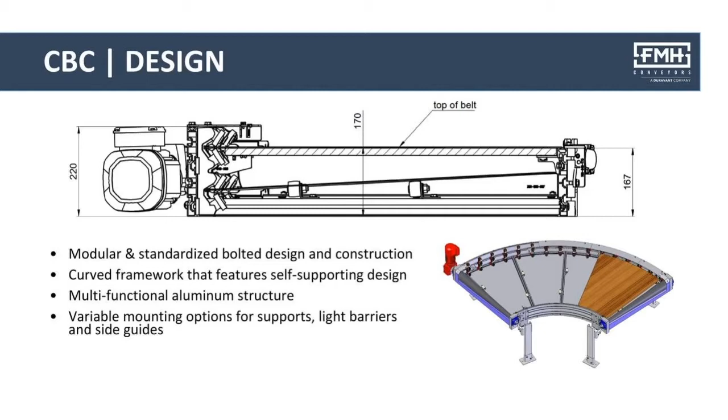Looking at the design, we have some abbreviations to help us gather the right information. We'll walk through these briefly. RI is the radius inside, or the inside radius of the belt. Nominal width is NW.

AN is our angle nominal, or nominal angle — that's our 90 degree, 180 degree of the curve. RCL is our radius center line. CH is conveying height, also top of belt or top of roller for roller applications.

SGH is side guide height, the height of the side guides above the belted surface. UW is usable width, also our between frames.

ROF is radius outside of frame. RIF is radius inside of frame. CSC is conveyor speed center line — the belt speed is measured on the center of the belt. CCW is counterclockwise, or left-hand flow. CW is clockwise, for right-hand flow.

In the graphic on the lower right, you'll notice A-V for this motor mounting position — this would be our outside of frame. Location A is this lower left pictorial. On the right, on the inside, would be location B.

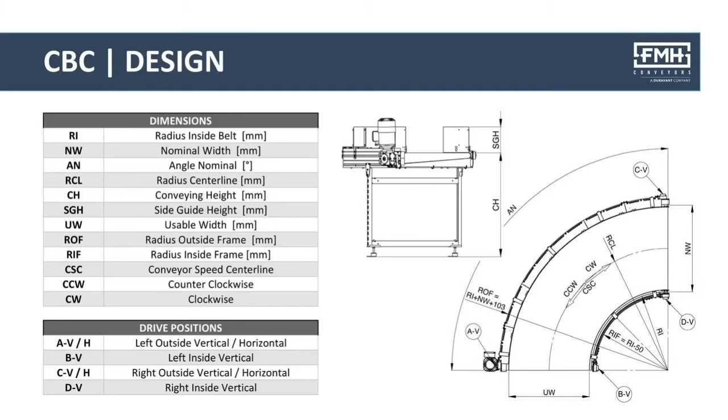Belt bead technology — taking a closer look, traditional type 1 on the left is a pretty basic belt bead technology where the bead is only on the top surface of the belt edge. A stronger belt bead is represented in the middle for type 2, where the bead is present at the top and bottom surface of the belt edge. While improving the belt bead, we now see a need to strengthen the stitching on the edge of the belt to handle greater loads.

The example on the right for the Motion 06 is the belt bead technology where the belt bead is moved inward on the belt to place the stress loads on the beading edge instead of the edge of the belt. The bonding and stitching process for the Motion 06 design greatly reduces the opportunity for belt failures with this improved technology.

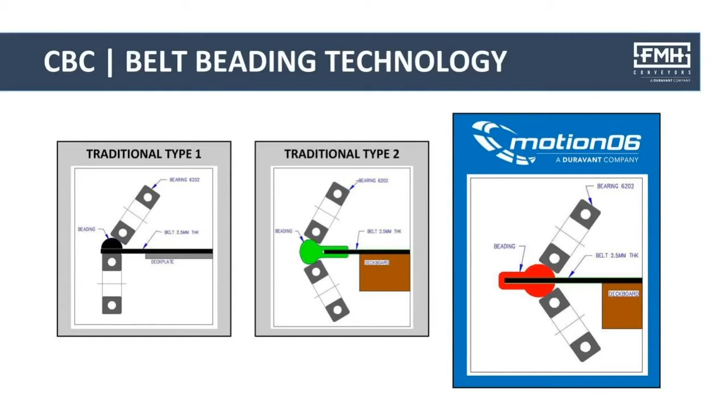With the guiding technology, this slide shows the stress loads on the belt, as they are no longer on the belt edge as with the Type 2 design. The loads are more evenly distributed, allowing a significant increase in belt strength.

The seam of the belt bead is offset from the seam of the vulcanized belt seam, so the bonding and double stitch of the belt bead greatly minimize the potential of breakage. The belt guiding is managed on the outside radius of the guiding profile.

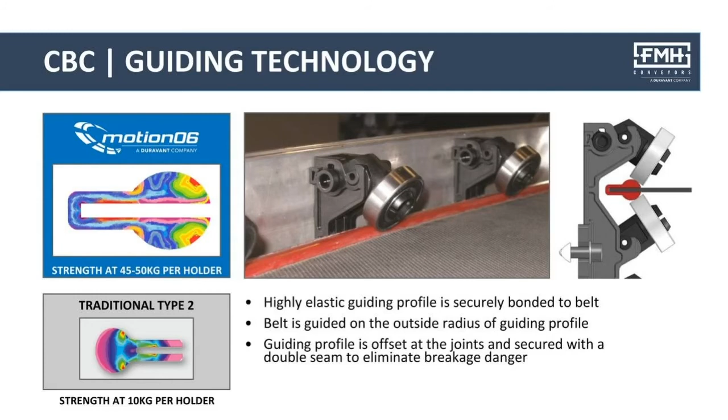Again with guiding technology, in this slide we can see the belt decking and belt removed to show the one-piece design for the upper and lower belt guide. This common design allows the belt guide to have quick release guide wheels on the upper and lower belt guide, in the event you need to change the belt due to wear or for predictive maintenance.

The photo on the right shows the common belt guide when the guide bearings are in a lock position and in the open position, for a quick belt change without removal of the guide wheels.

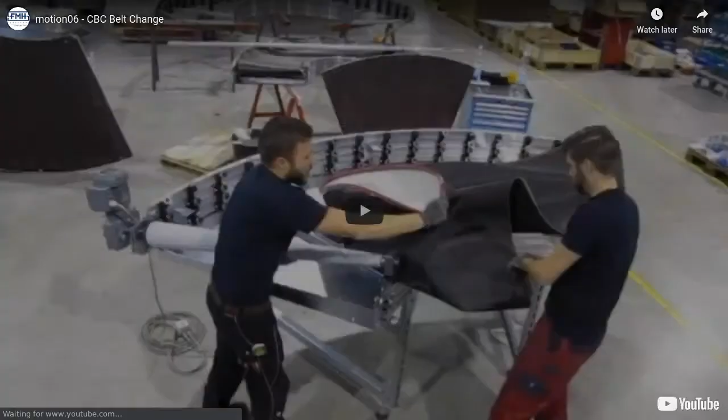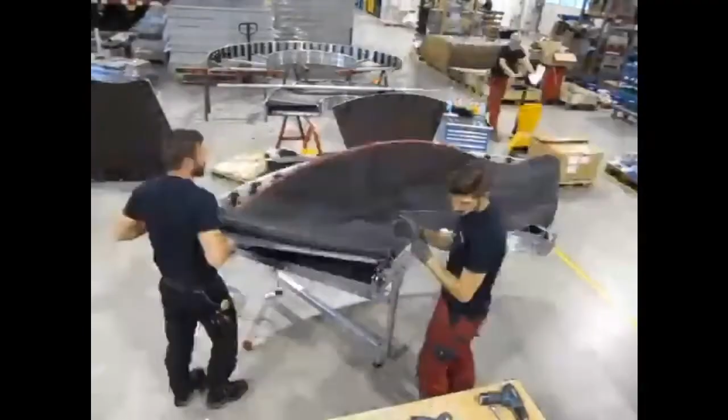This is a video of our belt change in our curve belt conveyor. With the one-piece easy access belt guide, it allows a faster belt change during planned maintenance periods.

Yes, this video has been sped up for this presentation, and normally at play speed it takes a little over 8.5 minutes to remove the belt and reinstall it. Keep in mind this is an ideal environment, and a belt change on a ceiling-supported system or on a mezzanine is expected to take about 15 minutes due to the known obstacles in an installed system.

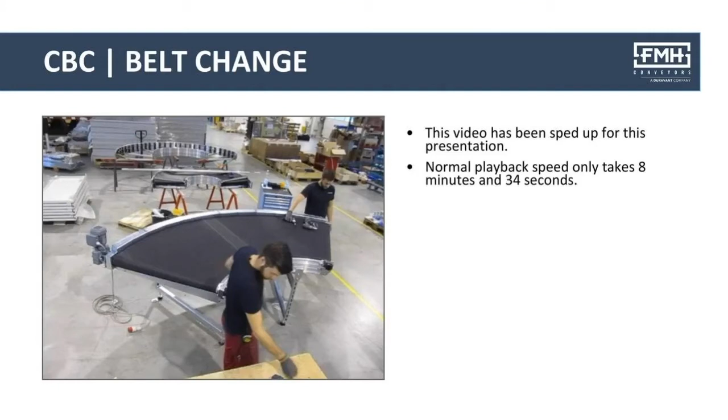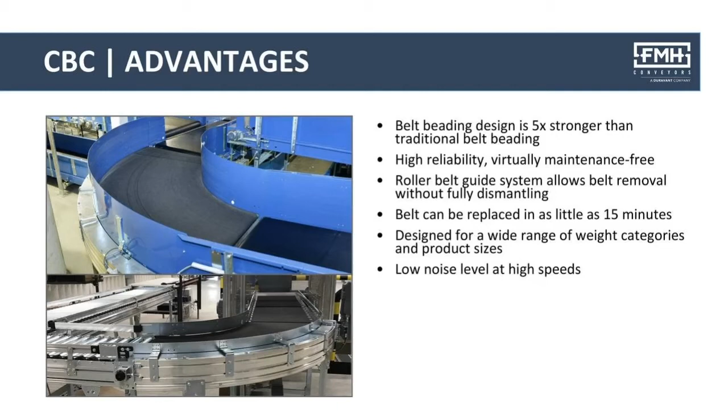Advantages: our belt bead design is 5 times stronger than traditional belt beading designs. High reliability and virtually maintenance free. The one-piece belt guide roller design allows for faster belt removal without fully dismantling the belt guides, and can be replaced in as little as 15 minutes. It's designed for a wide variety of weights and product sizes, with low noise levels even at high-speed operation.

Common specifications of our curve belt conveyor: we have a nominal width up to 59 inches. We have an inner radius up to 78 3/4 inch. Again, the angles we can provide are 30, 45, 60, 90, and 180 degree curves. Speeds can go up to 550.

I see a question - the slider bed material is a laminated decking.

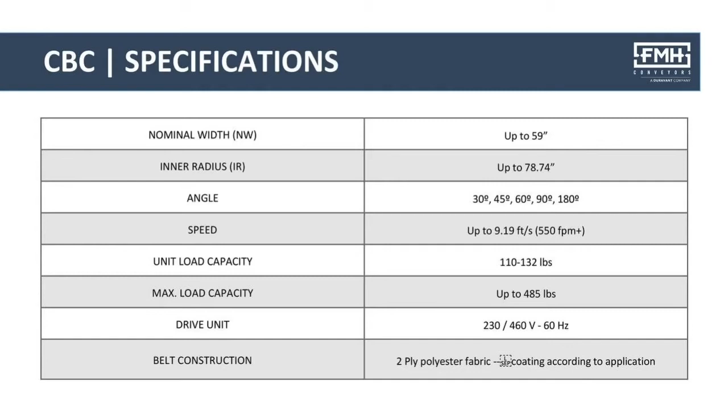We have AutoCAD blocks. We do have some dummy blocks that we can share.

On options, brake drives can be added. We talked about motor mounting positions - we have several motor mounting positions available. Keep in mind the belt is preferred to be pulling; if you have a motor positioned where it's pushing a belt, there is a capacity loss.

Variable support mounting positions: for floor supports, we have quite a few options as far as height and how the floor supports are designed. We can also do ceiling supports.

And side guide mounting options - we can control the between-frame width of the side guides and the height of the side guides. So we've got quite a few variations to fit your application. We can provide photo eye holders and variable mounting options, and we can provide pop-out rollers where needed.

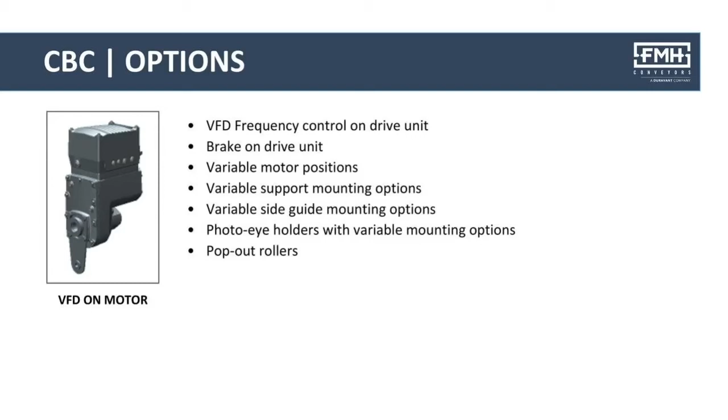Okay, we'll move on to other belted solutions. With the Motion 06 technology coming over, we now have the ability to offer straight belt conveyor, full belt merge, strip belt merges. We have an S transporting unit, an S lift, vertical sorting unit for a 2-tier feed, vertical transport unit, and high-speed diverter.

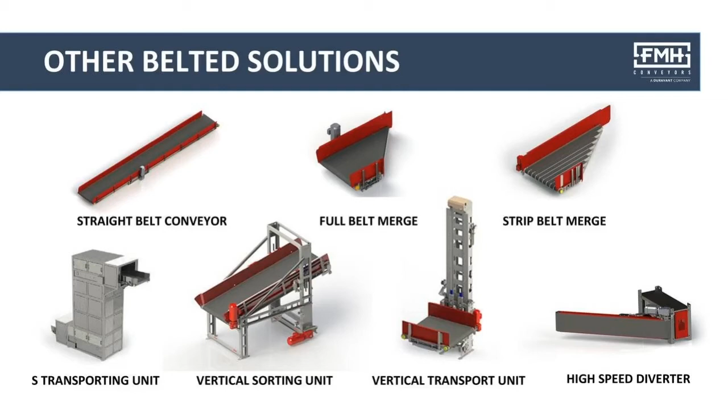Airport applications. This gives us a good overall view of a baggage handling system designed for airport solutions, where we have many of the components manufactured by Motion 06 as a complete system.

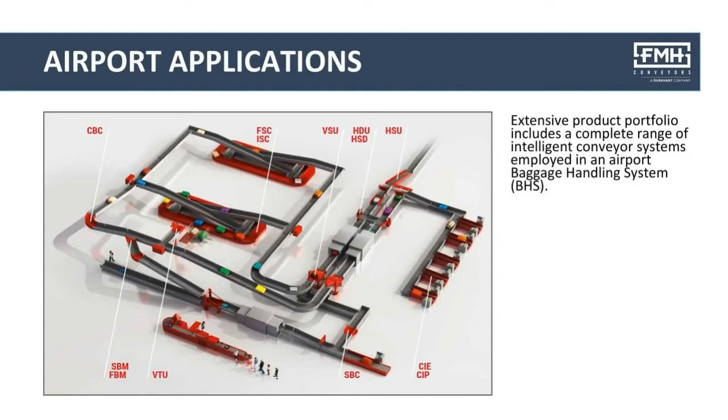Worldwide footprint. This gives us a quick view on the footprint of the Motion 06 technology. Motion 06 is headquartered in Austria. You see FMH Conveyors in Jonesboro, Arkansas in the Americas. Also the joint venture in Shanghai and Singapore, and agents in Seoul, Sydney, and Toronto.

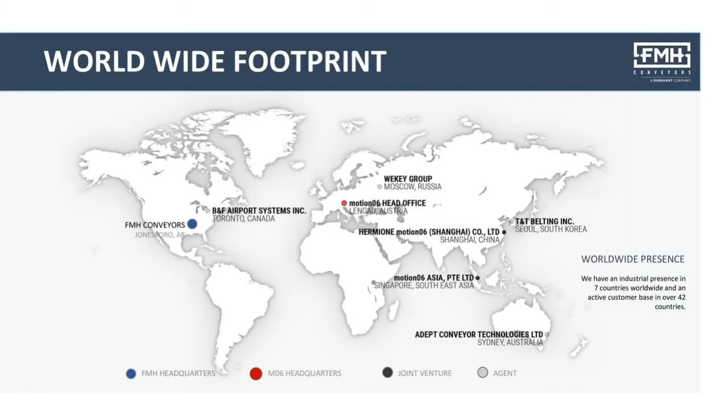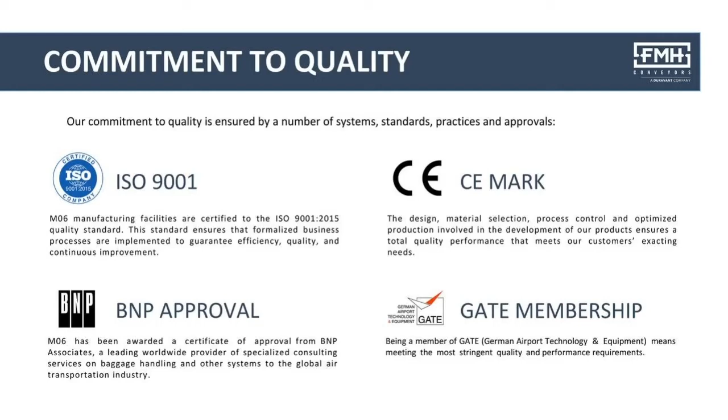Any additional questions at this point? Shortest straight section available - if we can, let's discuss that more one-on-one with your regional manager so we can find out exactly which product we're looking for.